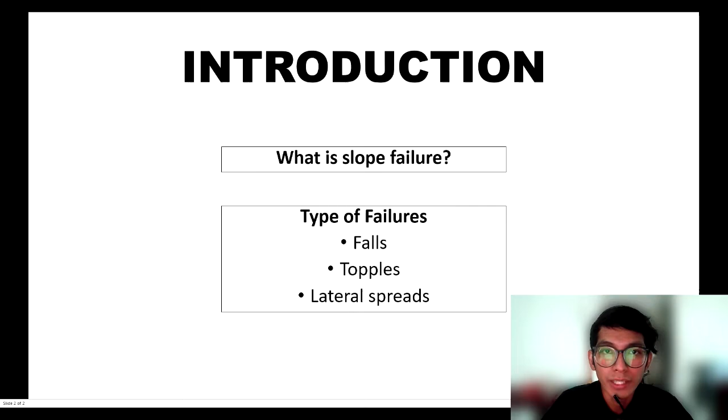Today I would like to talk about past successes in installing caisson pile walls and also in constructing soil nailing. Firstly, for the caisson pile wall, in November 2001, a Rebernice landslide occurred. It caused fatalities in the residential area around it. To fix this problem, an anchored pile wall with an additional anchored grid beam structure was proposed.

Over the years, the slope remedial on the Rebernice landslide has received positive feedback from engineers. Firstly, the creep deformations decreased over time, and secondly, the retaining structure and the drainage system operated effectively over time.

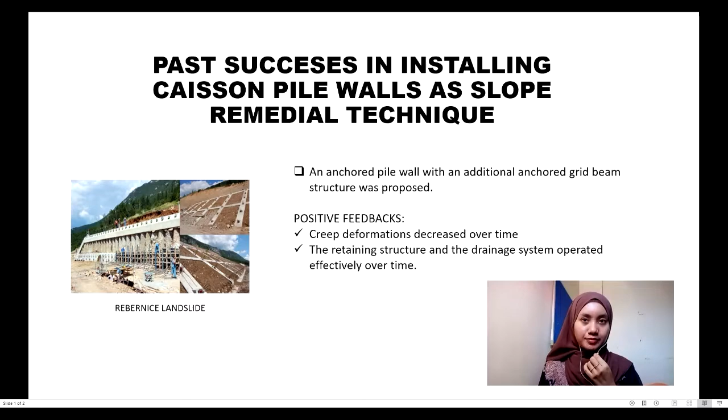Secondly, soil nailing and pressure grouting have evolved since 1917. They have solved many slope failures. For example, in India, a landslide occurred in a critical state. To fix this problem, steel bars were placed at an optimal angle into the soil slope, and pressure grouting, which is the shotcrete, was grouted towards the soil nailing to keep the soil nailing in place.

Then, to design the soil nails, American and British standards were used. The positive feedback from this slope remedial is that we identified the factor of safety is 1.29, which is safe under heavy rains. Also, the process is fast.

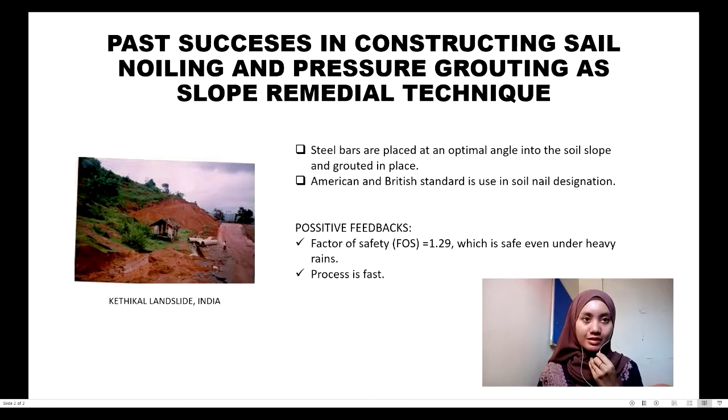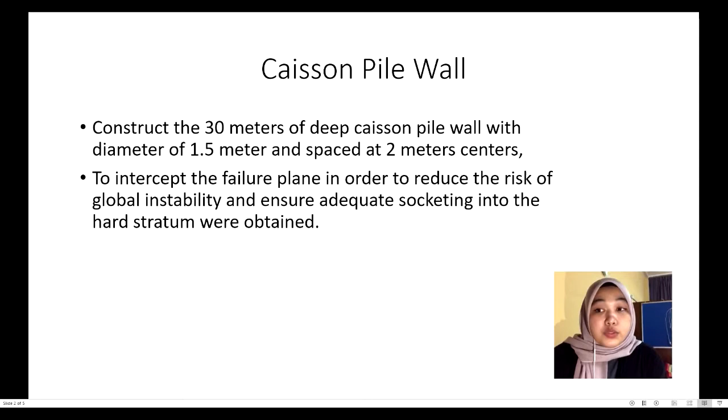Today I will explain the techniques we propose to remediate the slope failure at Bukit Antarabangsa. The first technique that we propose is using the caisson pile wall. We construct a 30 meter deep caisson pile wall with a diameter of 1.5 meters, spaced at 2 meter centers. This is to intercept the failure plane in order to reduce the global instability and ensure adequate socketing into the hard stratum is obtained.

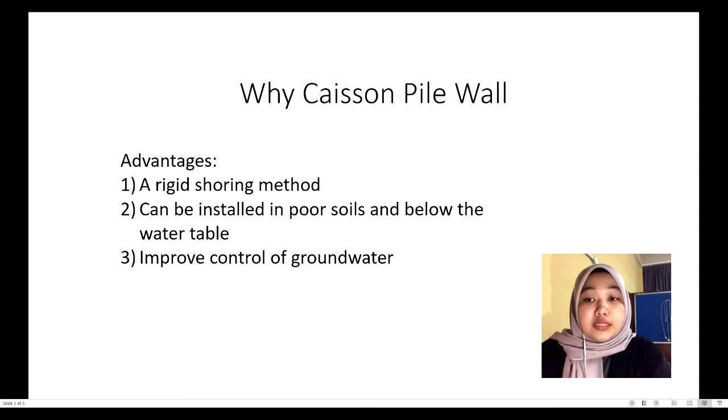So why do we choose the caisson pile wall? The advantages of employing a caisson wall include the fact that it is a rigid shoring method that avoids ground loss, and it's perfect for shoring near existing structures and other sensitive infrastructure. It can be installed in poor soil conditions below the water table and improves control of groundwater, which means it can be designed as a cut-off wall to retain water and reduce project dewatering requirements.

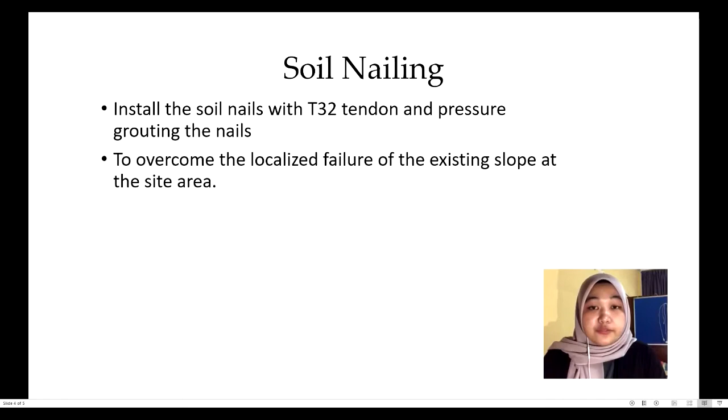The second technique that we choose is soil nailing. We propose to install soil nails with T32 tendons and pressure grouting. This is because we aim to overcome the localized failure of the existing slope at the site area. Pressure grouting was proposed in conjunction with soil nail installation to ensure that the soil nails achieve adequate anchorage friction, particularly in the loose pockets.

So according to the JMG resistivity test, loose pockets can be found in around 20% of the slope area. As a result, in order to strengthen the slope, this 20% of the slope area must be covered with grout.

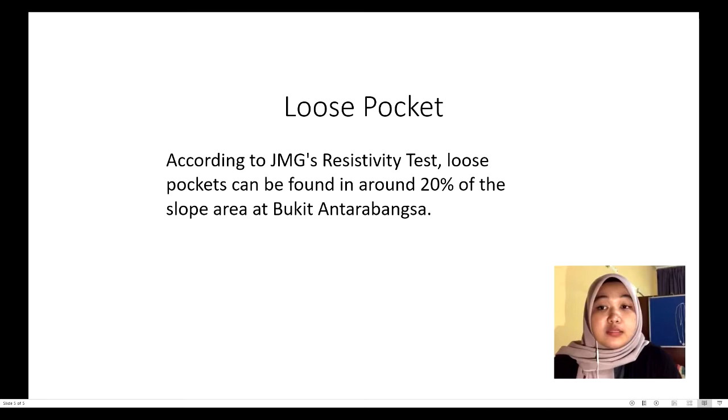Soil nailing is a construction technique that allows for the safe oversteepening of new or existing soil slopes, and it is used to remediate unstable natural soil slopes.

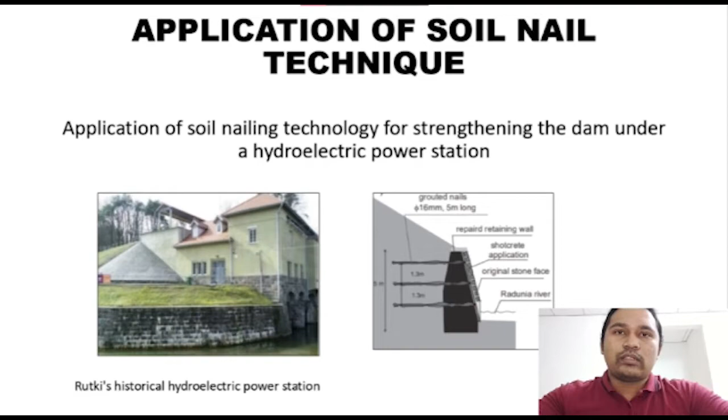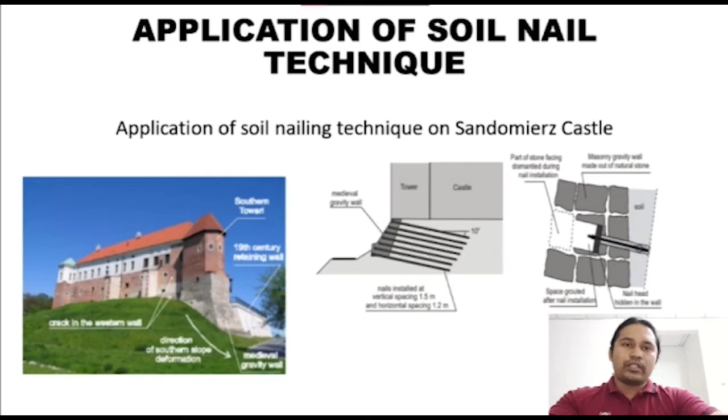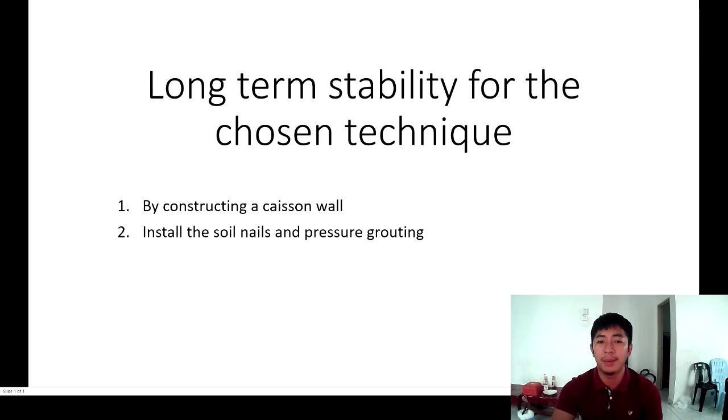And the other one is installing the soil nails and pressure grouting. Soil nailing is an earth retention technique used to stabilize slopes, existing retaining walls, and deep cuts. During the installation of soil nail walls, holes are drilled with a slight downward slope. Reinforcing bars are inserted into the holes, and then the bars are grouted into place for stability. Typically, multiple soil nails are installed in an engineered pattern to stabilize slopes and other structures.

In conclusion, over the decades, these slope remedial techniques, which are caisson pile wall, soil nailing, and pressure grouting, have shown positive feedback from engineers and society. Many advantages can be taken from them, such as a quick process and minimal movement during construction. These remedial techniques can stabilize the slope for a long time, but it depends on the design.

However, to maintain these slope remedial techniques, we must ensure that visual inspection and maintenance of the slope stabilization is done regularly.